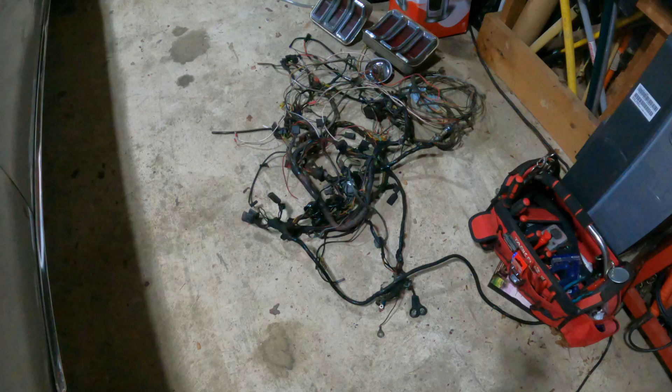What did I do? Well, that's the whole harness. There it is. Pulled the whole thing out.

And it is just a gnarly old wiring harness. Half the stuff was hooked up, half the stuff wasn't. Just wires and ugliness and crimps and electrical tape and all kinds of ugliness with this old thing. So anyhow, that's a major goal.

So getting all the old harness out, that was a big deal. I was pretty excited about that. We got that done the other day.

Obviously removing it's maybe a little bit easier - well, I would say a lot easier, because you can cut wires and stuff and just kind of destroy it, because you know you're putting back new stuff. So whenever I get to a point where something was fighting me or whatever, we would just cut the wires and pull it off. So I'd say the hardest part was underneath the dash.

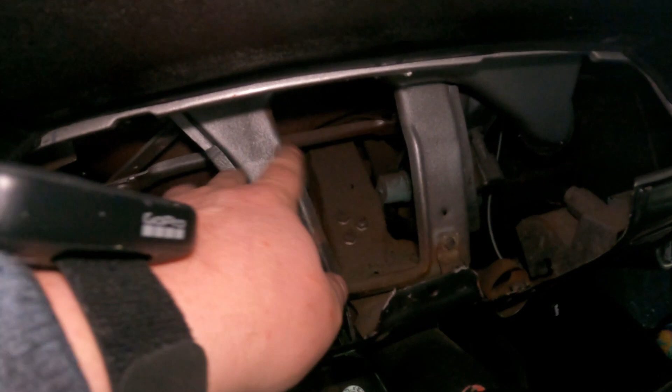There was, when you get back in here and stuff, some of that stuff I had to pull through the firewall, and it had a big old grommet on it, and it was really hard to pull out of there. So, but we got it all. I mean, everything's unhooked. So I even pulled the stereo out like I said I was going to.

I mean, awesome. Again, I had my good friend Tom come over and help me, and that went really well. We worked pretty good as a team, so we just kind of divided and conquered. I think I started in the rear of the car with all the tail light harness. He started up in the front, and we just kind of chipped away at it together.

So, all right, well, what's next? You got the old harness out. What's next? Where do you start? I decided I want to start in the rear of the car. I read somewhere or saw on a video or something that the rear of the car isn't as bad, and it could be like one of those small victories that kind of keeps you excited about the project. So I was thinking about doing the whole rear harness.

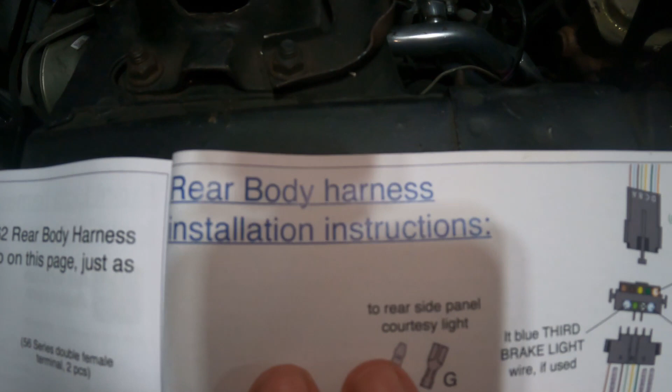So let's take a look at this here. Let's take a look at this here. So this is the whole, open up big ways, I guess. This is the rear body harness installation instructions.

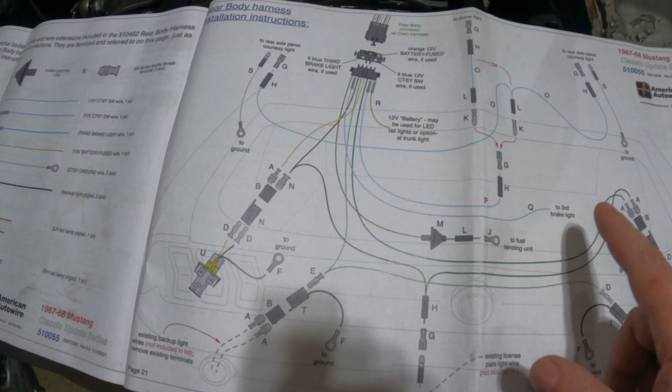So if you look at this page in a whole, you can see where, like down here is your backup light, turn signal. This car actually had courtesy lights on either side that aren't going to get hooked up. The dome light, I haven't decided about that yet because we don't really have the door switches. But if you look at this part here, this is what's important.

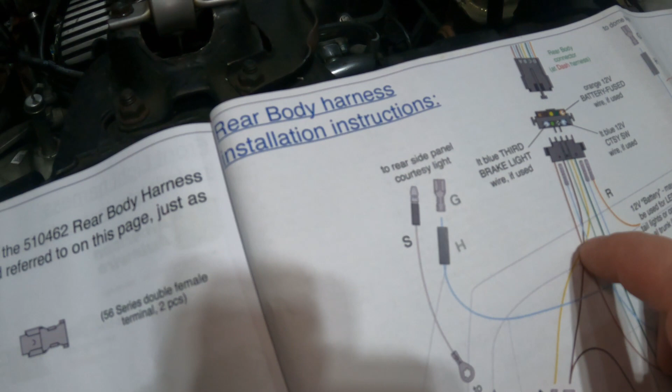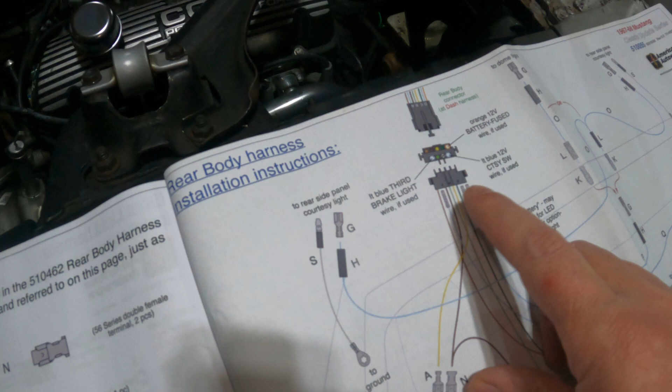We try not to put a shadow on it. So there's a couple, the connector here has some wires that are already been put in it, and that's definitely stuff that you use. There's also a couple extra wires that haven't been put into that connector because they're kind of like optional. Maybe something you will use, maybe something you won't.

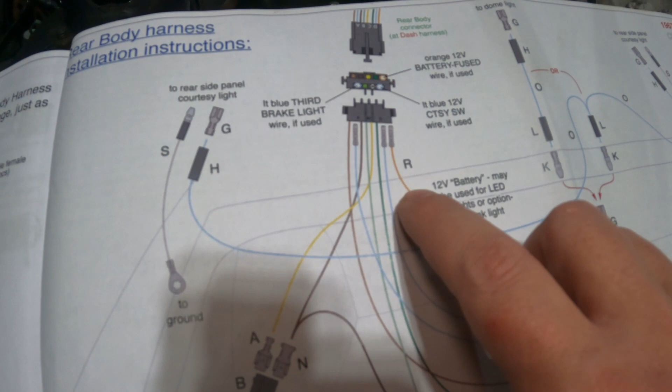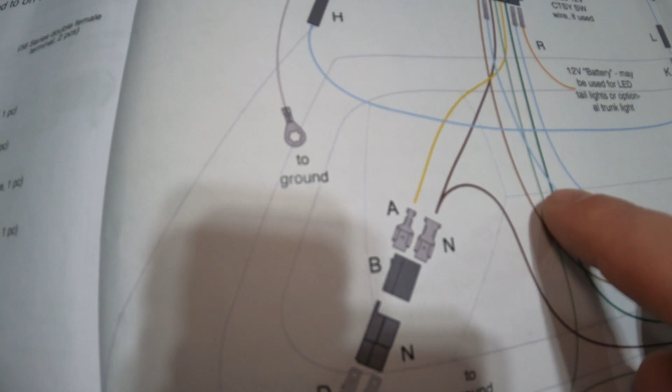So if you look here, there's a wire over here, an orange one. Pardon me there. There's an orange wire that you can pop into that circuit. And it says here, 12-volt battery, may be used for LED tail lights or optional trunk light. I was thinking about using those because I've got the LED tail lights, but there's also a wire here. It says third brake light. It's a blue wire. And you can see here, it's not in the connector. So I'm going to go ahead, I went ahead and popped that wire in there.

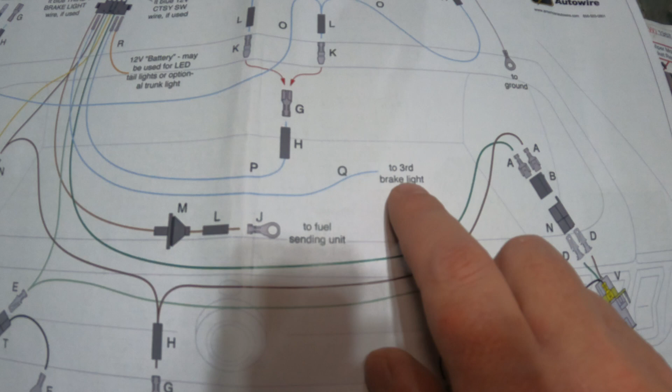And I'm going to run this blue wire to the back because there might be a function on those LED tail lights that might utilize this. So I'm going to run that. What else does it say?

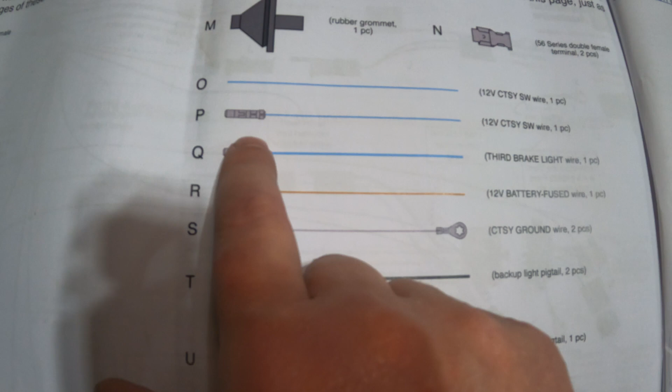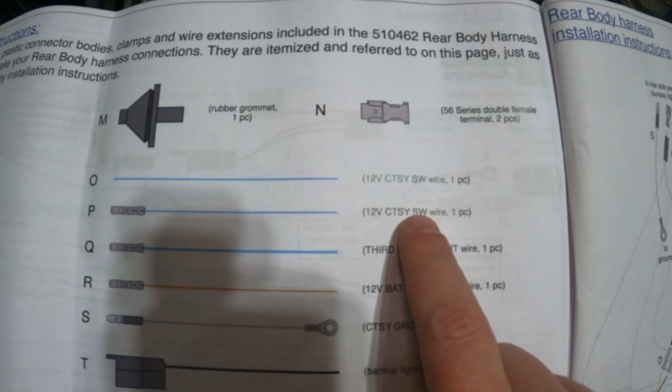So there's even, I think they even sent like a bare wire. So if you look over here, you can see it's got the letter P, and it says 12 volt courtesy switch wire. So the courtesy switch is like, there's these lights in the back of the car, and when you open up the door, the little jamb switch opens up and it turns those lights on. I don't have those in my car, so I don't really need that.

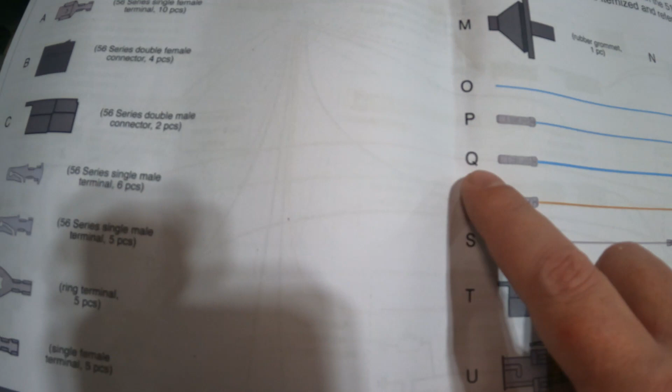Again, there's this one here, Q. This is for the third brake light. We're going to wire that in there. We've got this other one, R. That's 12 volt battery. I'm not going to use that one, I don't think.

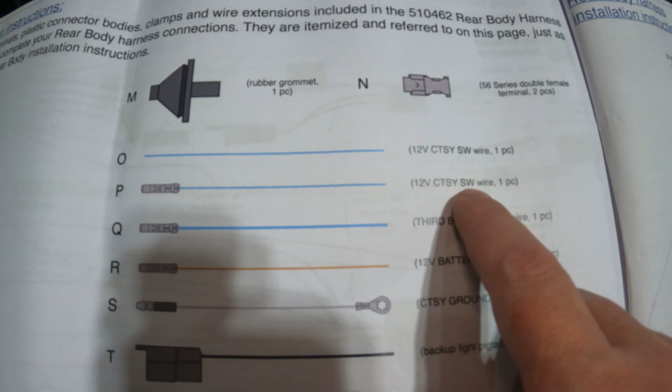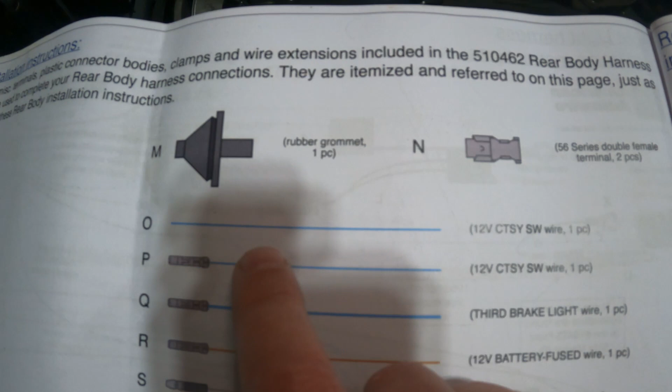And then there's a couple ground wires for these courtesy switches, and I'm not going to use. But they also had a wire here, O, and it's basically a wire that was meant for the courtesy switch. But I'm not actually going to connect it into this at all. I'm just going to run it with all of those wires.

The reason being is I have an electric fuel pump in this car, and it sits back here in the trunk area. I don't know if you can see these two screws right here. Basically on the other side of that is where I have my electric fuel pump, just sitting there by the tank.

So there needs to be a power wire that runs to it. So I'm going to run that extra wire while I'm running all these other ones in the back. So I have my electric fuel pump wire, and it'll be run all nicely inside the car, not underneath and all that. So it takes a little bit of planning, a little bit of thought when you're doing this, because there's optional things that you can plug into the harnesses.

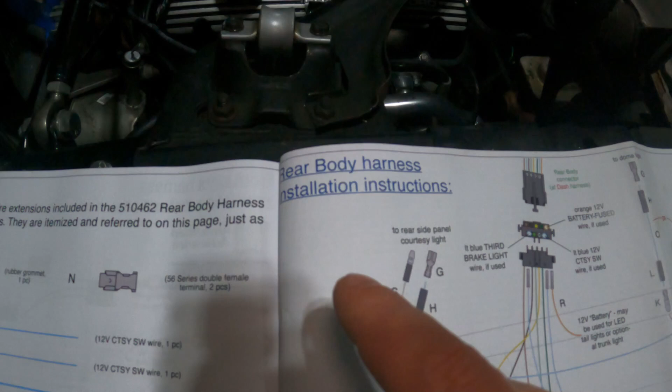So that was the main thing I wanted to point out on this video, kind of like you have to think. I want to do one thing at a time, which is just do the rear body harness. So on these instructions, it's like every page is a different segment of the job, maybe, if you will.

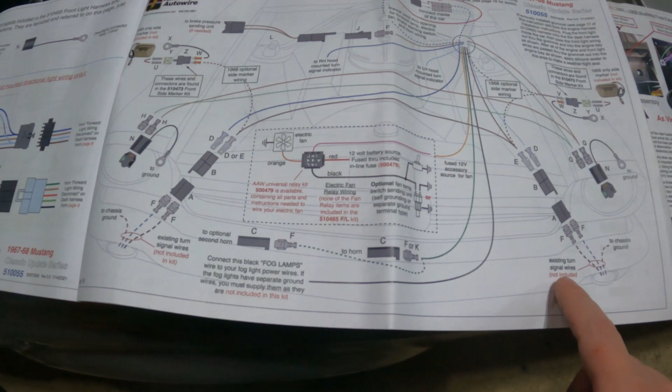So this is for the front light harness, this page here. As you can see, it's got your turn signals here, headlight, turn signal, headlight. You got some horns. And then this wiring harness allows you to run wires if you have an electric fan, which I don't have, but I still might run those wires up there.

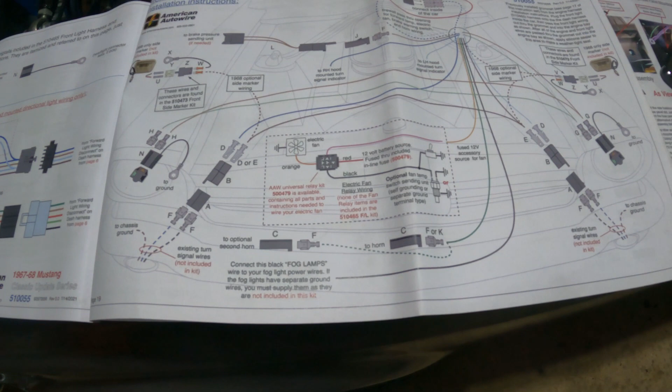So there's just a lot of forethought, a lot of planning that goes involved. So like I said, I want to divide this up into just these little segments to where I'm just focusing on that one segment, this rear body harness.

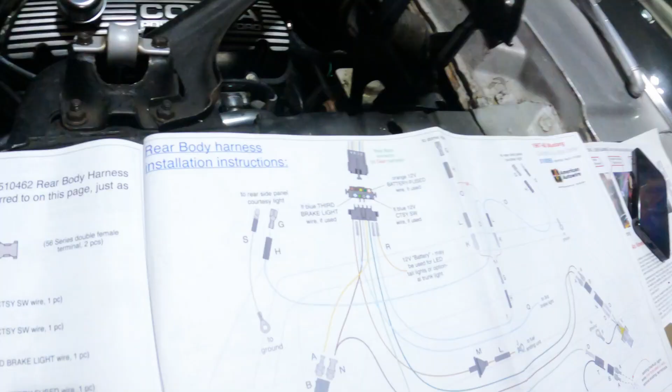And then I can get that all finished and check that off the list and just focus on that one section. Because everything as a total is kind of daunting and your mind can wander. So this is the way I really want to do it, is just do it in little segments. So again, I'm going to be working on the rear body harness, all the rear lights and all that kind of stuff, the backup lights.

So if you look down here, here's the connector that sits up underneath your dash and goes to the rear of the car. So I just put this on here to kind of weigh it down a little bit so I could stretch this out. It comes all rolled up and bundled. So when you start to take it apart, it's all just twisted and round and stuff.

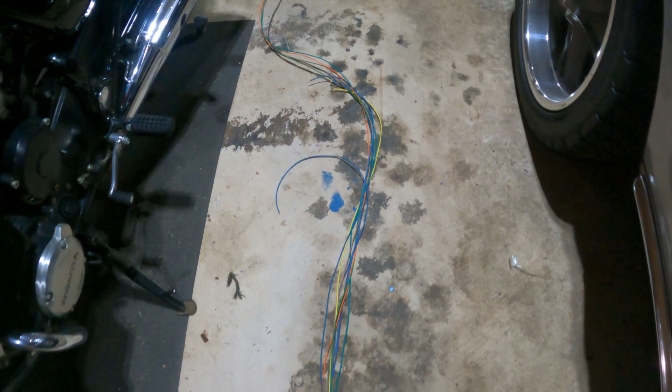So I just kind of stretched it out across this floor here. And I mean, these wires are super long. This is the whole length of the car and then some. So you're obviously going to have plenty of extra.

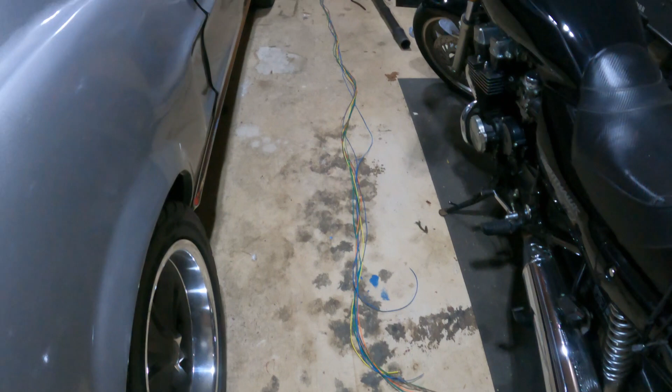So this is the rear body harness wires here. I've got that sheathing, like I said. I'm going to sheathe everything and put shrink wrap on all of it. And that's going to be step one right now for the rewire, just that rear body harness.

Again, I just wanted to make a quick video kind of updating you where we're at right now. I think on the last video I left off on removing the old harness. So there you go, I removed the old harness.

And I'm glad I did. It was really gnarly, definitely some really iffy looking stuff. So happy to do it.

So all right, well, one bite at a time, one bite at a time. Remove the old harness - that's history. Done with all that. So now I'm into putting all the new stuff in.

So the rear body harness, I can show you this too. So, driver's door here. Is my light on? Yeah.

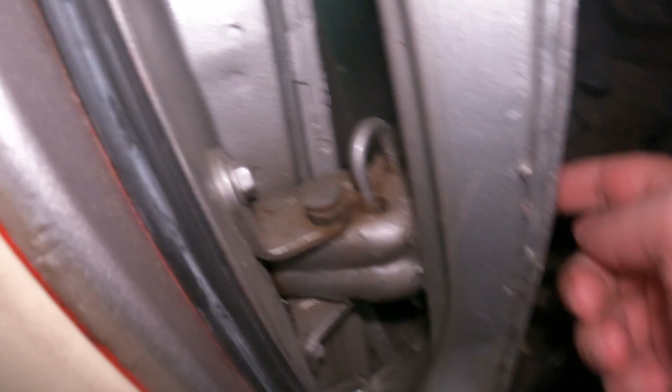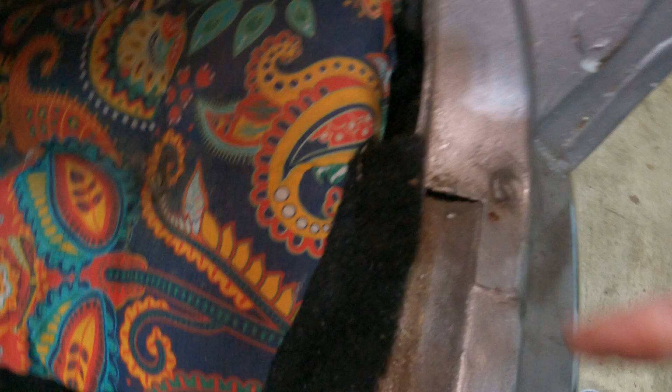So there's a little tunnel down here that goes back into this kick panel spot, and this is where the connector lives, back in here somewhere. So, and then all the wires run down through this tunnel, and then there's a little thing that goes underneath there, and then the wires run up into this cavity here.

Which, you know, you got to make sure you're not getting anything wrapped around this window mechanism. That's pretty important. And then they just kind of run out over this wheel well here and into the trunk area.

So that's my next goal. I'm gonna wrap up that harness, the rear harness. I'm gonna get it all sheathed and everything. I'm gonna run it through that little path that I was just showing you. Get everything here to the back of the car.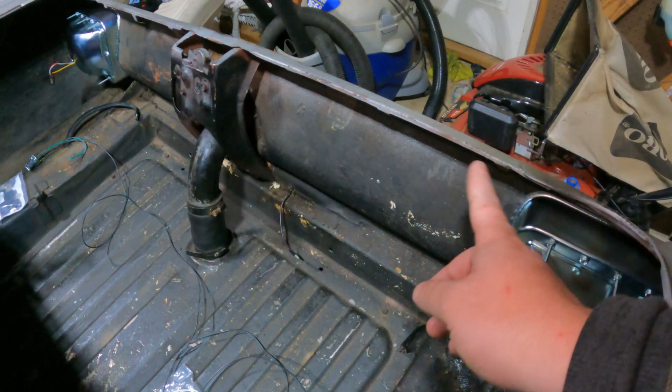You know, like I said, just try to get everything run, get its path figured out, where everything's gonna lay, where it's all gonna sit, and then just start wiring some stuff up, and then move on from there.

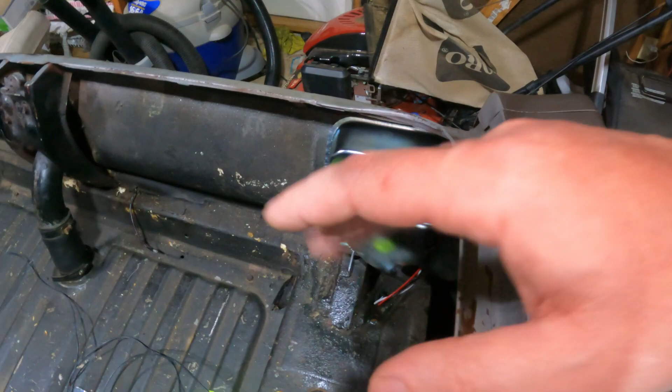Haven't quite figured out where I'm gonna go after the rear harness yet, but I know for now we're gonna work on the rear harness and get that all knocked out. So cool. All right, I think I'm gonna leave it there.

Like I said, the goal from the last video was to get the old harness out, which we did. I think the goal for the next video is to get that rear harness run and start to get the wires laid out and start making crimps and connections and stuff.

I think I'll show a little bit of that, maybe. I don't know how much I'll show running the harness and stuff, but I think once I get everything back into place, maybe I'll show how I'm putting sheathing on stuff, a little bit of shrink wrap, and how I'm making my crimps and connections and all that kind of good stuff. So a little bit of that.

There's going to be a bunch of that throughout the video, so I don't think I need to show all the crimps and all the connections that I'm making, just some of them, so you get an idea. And that should be pretty good, should be informative enough for these videos.